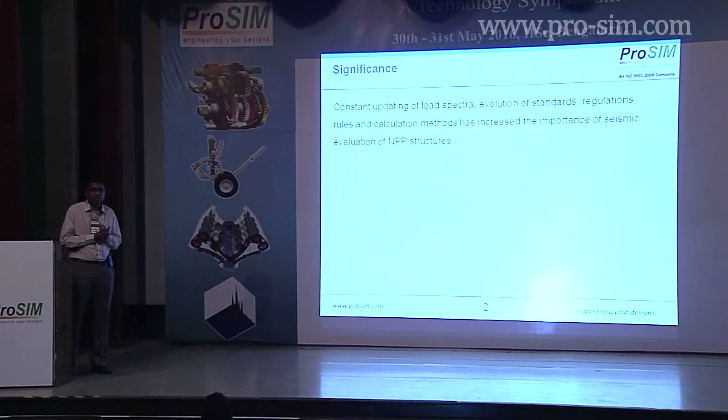We'll be talking about the significance of seismic evaluation for nuclear power plants.

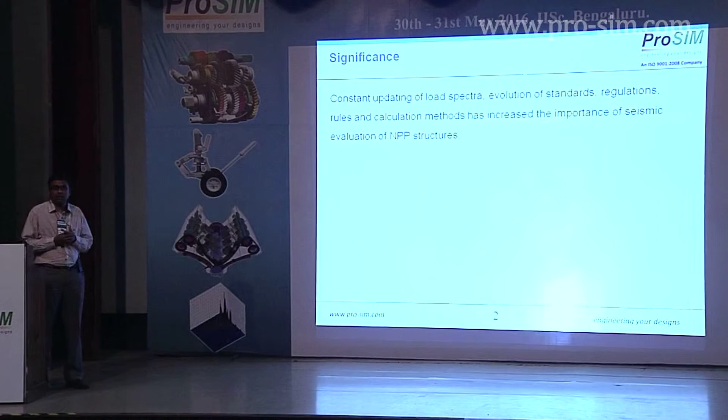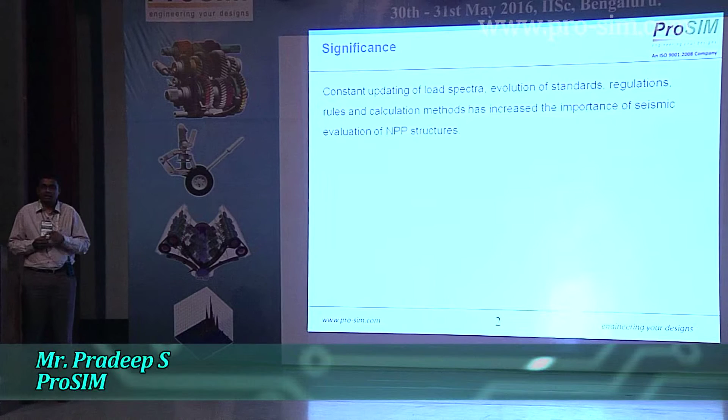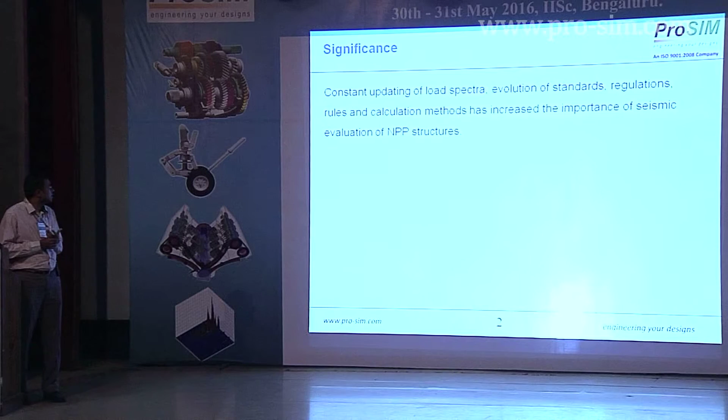First, there's been a constant updating of the loading spectra. Whenever we have a major earthquake, the authorities have a rule that the seismic map of the country has to be redone. Based on that, we've had updating of the loading spectra. Over time, we have had evolution of the standards, regulations, rules, and calculation methods. All of these have put the importance of seismic evaluation to a different level.

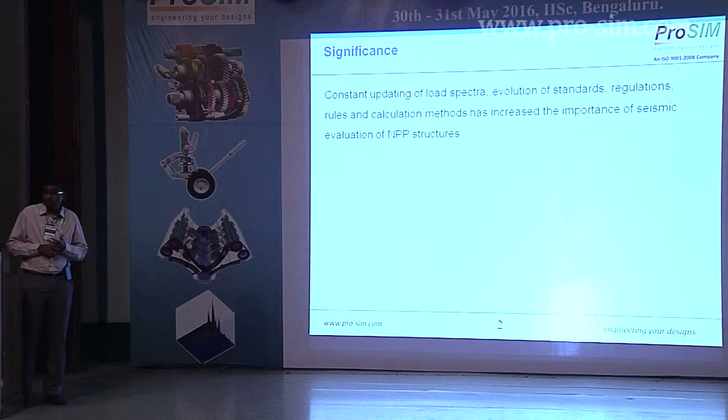Until March 2011, when the Fukushima incident took place in Japan, many of us were not really aware of what could happen in the event of a nuclear meltdown. All of this has now emphasized the requirement of seismic evaluation of NPPs.

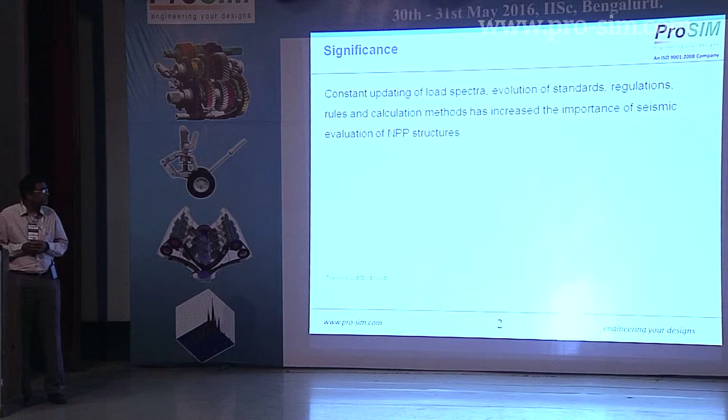Next, please. To come to the type of seismic vibrations: first category is events which take place in nature. Whenever we have a tectonic variation under the earth, we have earthquakes, and whenever we have magma flowing under the earth, we'll have volcano eruptions.

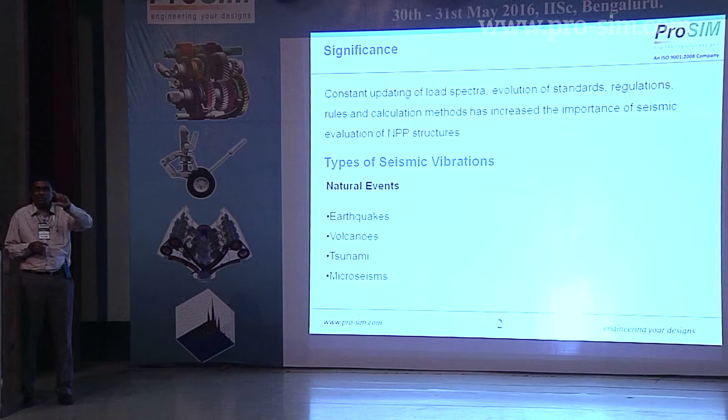And as I mentioned, the word tsunami - the sad irony is that this is a Japanese word. Until 2011, nobody was aware of it, but nowadays even the auto drivers and taxi drivers are familiar with this word. They put this behind their vehicles: do not follow me, I am tsunami. That's the kind of impact that's been made on the public.

Microseisms are mild murmurs, as they say, which take place under the earth at a very deep level.

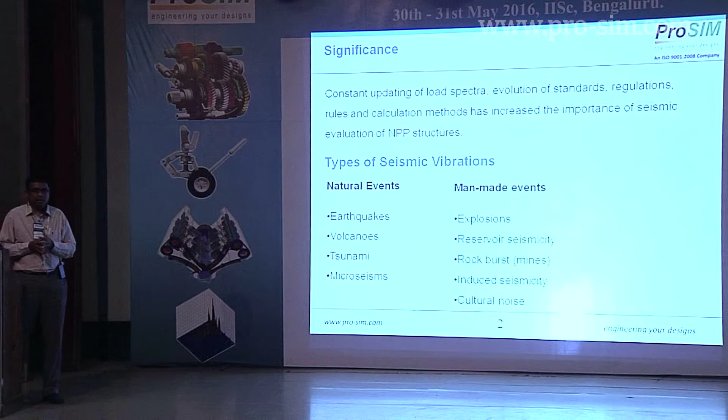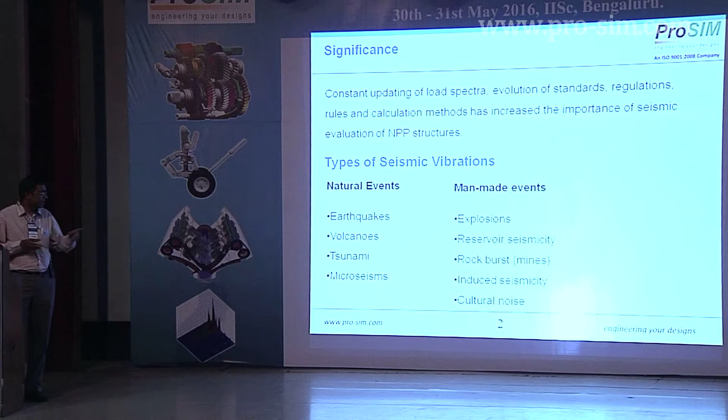Then we have man-made events: explosions, which could be nuclear or chemical. Whenever we have huge dams and lakes, we have reservoir seismicity. Many times we've read in the news that mines collapse, resulting in bursting within the mines, which gives rise to rock bursts and seismic vibrations. Induced seismicity is when we have huge drill rigs, especially in the oil and gas sector. And then we have cultural noise, which is going up day by day - vehicular traffic and so forth.

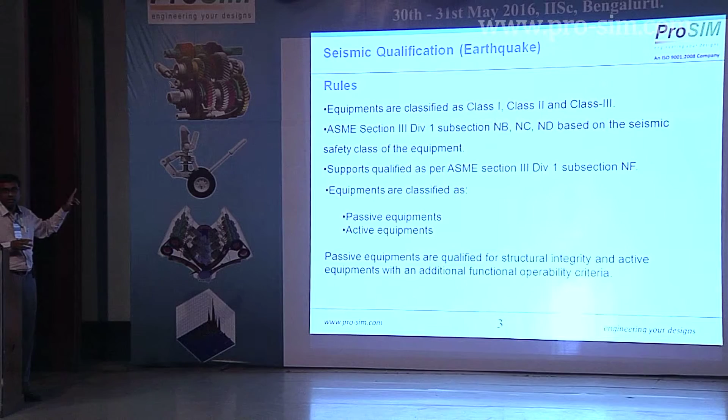Before we start the seismic qualification, I would like to mention that this presentation covers only the natural phenomenon, that is earthquake. There are certain rules before we take up the qualification.

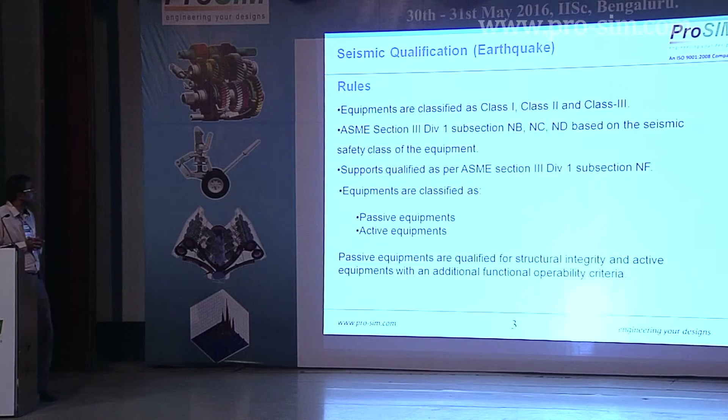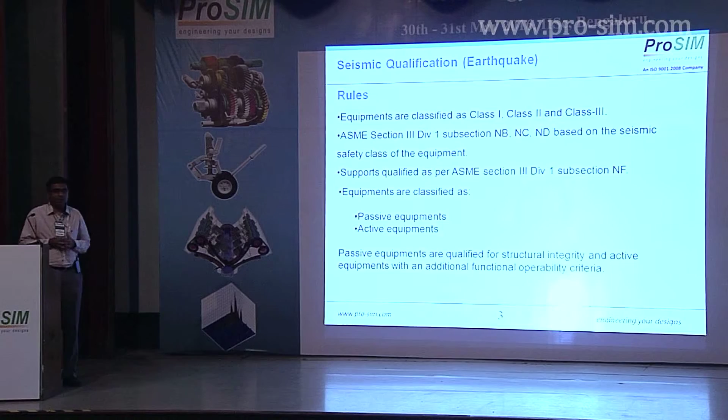All equipment in a nuclear power plant is classified into class 1, 2, and 3 based on their severity. A class 1 equipment is that equipment whose performance, or the lack of it, will directly impact the safety of the reactor and its auxiliary equipment.

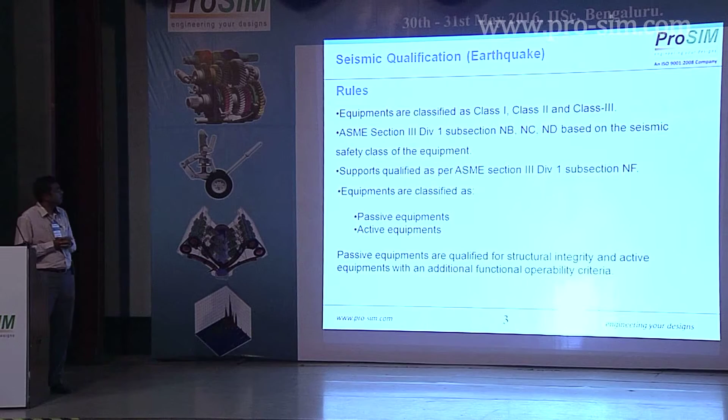The ASME Section 3 is the one which addresses the nuclear parts. The subsection NB is used for qualifying class 1 equipment, NC for class 2, and ND for class 3. The supports are to be qualified as per a different code, again Section 3 NF.

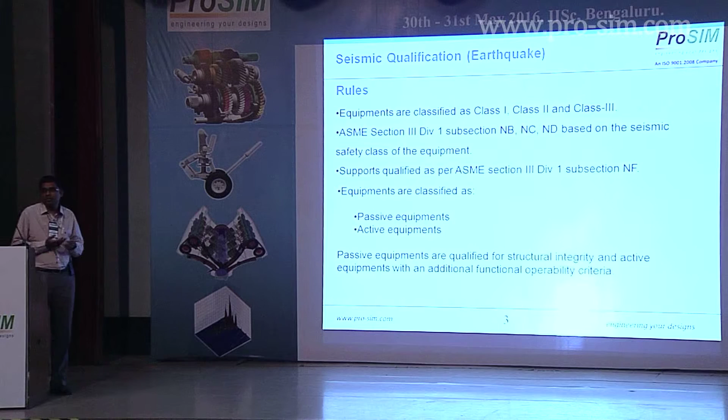But before that, all equipment is also classified as passive and active equipment. Passive equipment are those which do not have any relative motion within themselves - for example, a pressure vessel or piping can be classified as passive equipment. An active equipment is one wherein parts are moving relative to each other - for example, a valve, a pump, a compressor, or a motor.

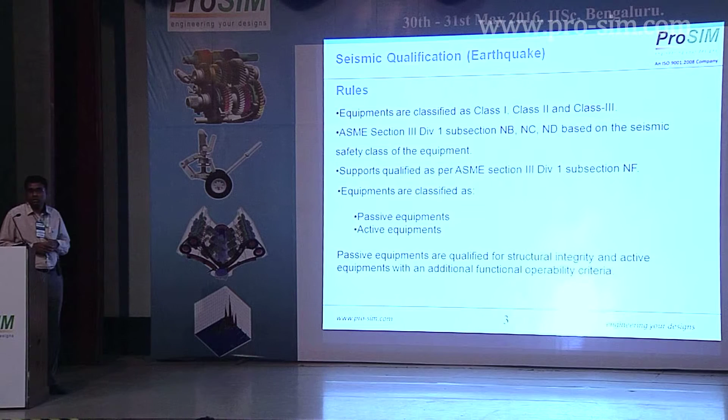So the difference between them is that passive equipment is to be qualified only for structural integrity, whereas active equipment has to be qualified both for structural integrity and functional operability. The functional operability criteria will decide how the particular equipment will behave during the event of an earthquake.

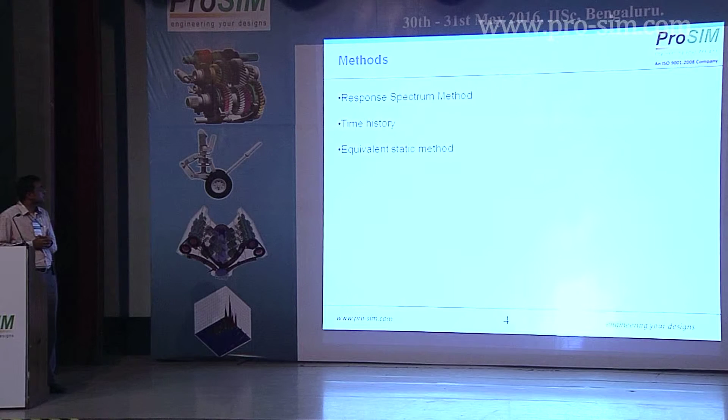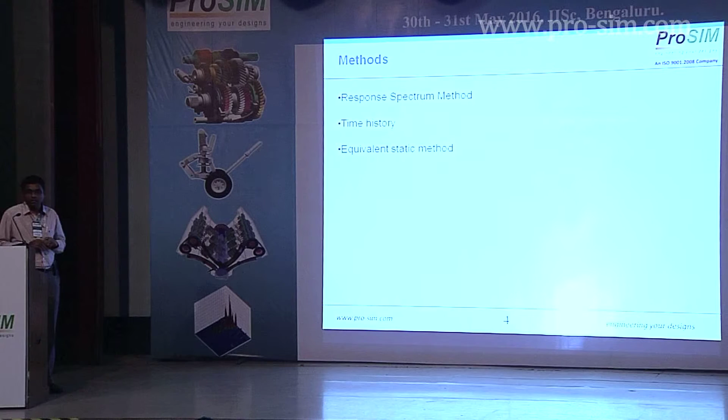There are different methods in which structures can be qualified. The first is the response spectrum method, which I'll be talking about today. Then there's the time history method, where you have direct acceleration versus time. And then we have the equivalent static method, where you just take 1.5 times the acceleration value and apply it as a static load, but that is applicable only when you have a natural frequency above the cutoff frequency.

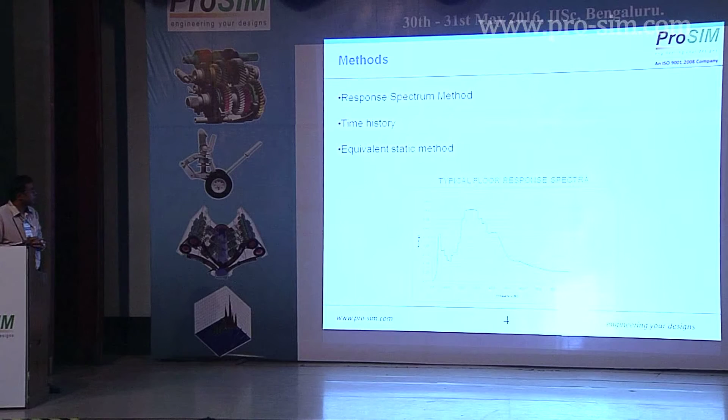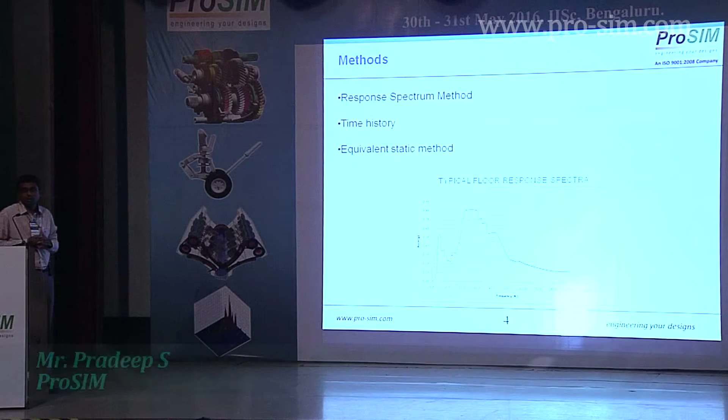So this is a typical floor response spectra. This particular spectra is available at all different elevations of a plant. So the floor response spectra corresponding to the elevation where the equipment is mounted has to be used for qualification. This spectra will be different for the three directions. For example, if x is horizontal and we do not have the vertical direction, we can take 2/3 of the horizontal for the excitation.

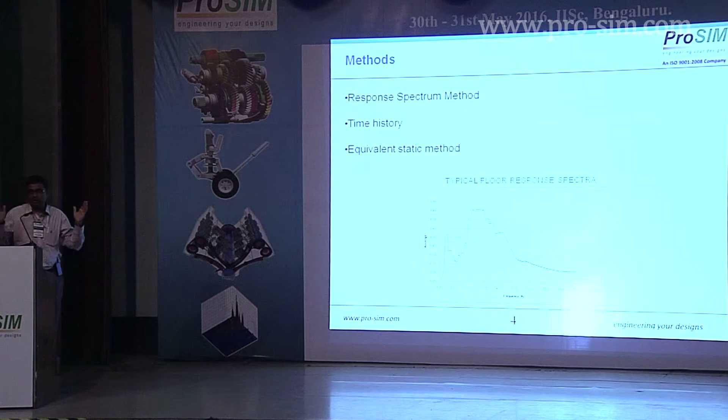So the way this works is that we do a natural frequency analysis of the particular structure, and based on that we run the response spectrum analysis. Those frequencies corresponding to the accelerations are multiplied, and all results within the frequency of the spectrum—in this case 100 Hertz—are combined using the CQC or the SRSS method, based on the spacing of the natural frequencies, how closely or far apart they are.

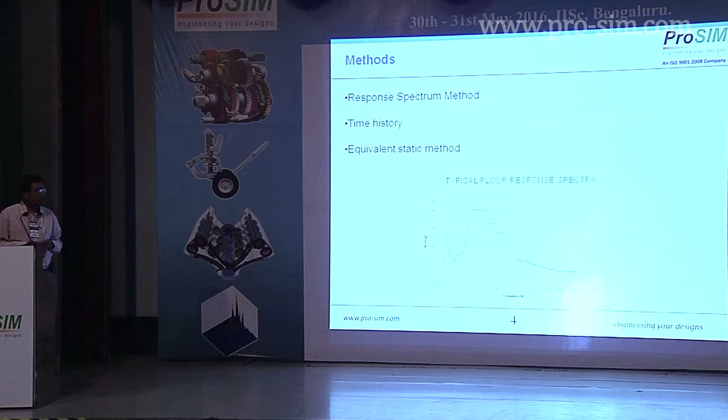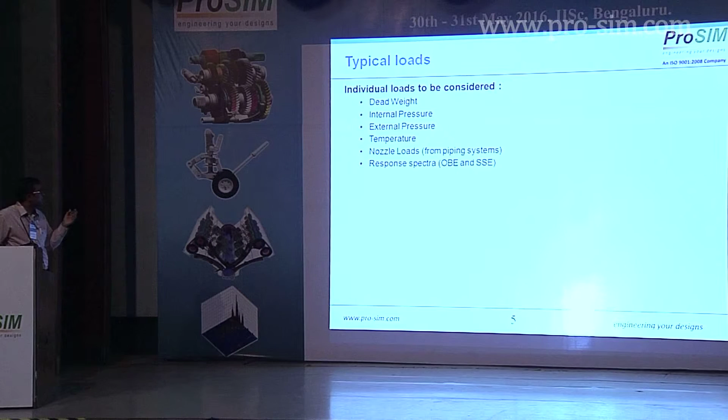So these are some of the individual loads that the equipment is typically subjected to: weight due to gravity, internal pressure, external pressure, and temperature. These are static loads, and then we come to the dynamic load cases, that is the OBE and the SSE.

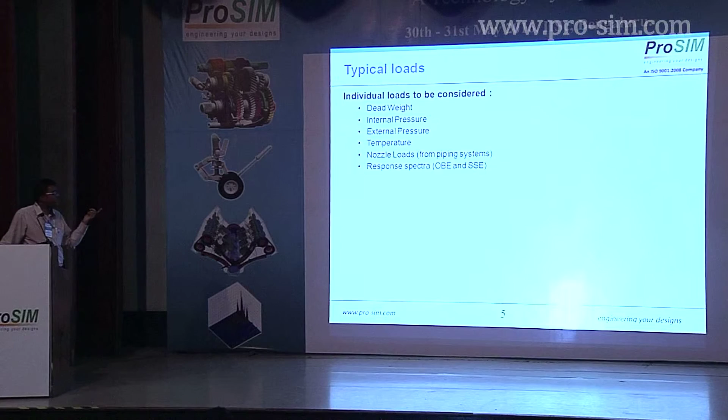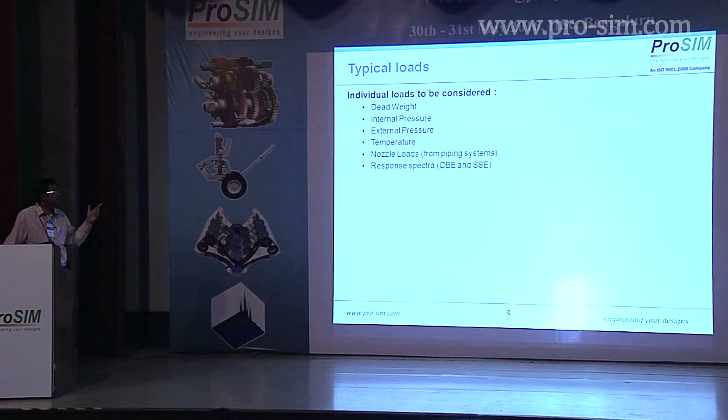OBE stands for Operating Basis Earthquake—the magnitude of earthquake wherein the plant has to keep running despite this earthquake hitting the facility. The SSE stands for Safe Shutdown Earthquake. Even if an earthquake of that magnitude hits the facility, it should be able to be safely brought to a shutdown situation.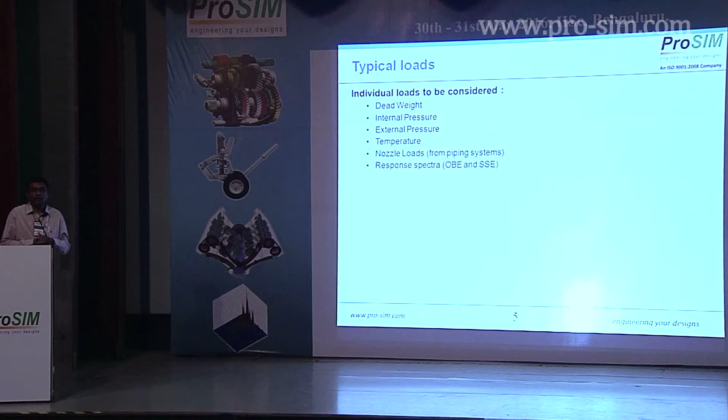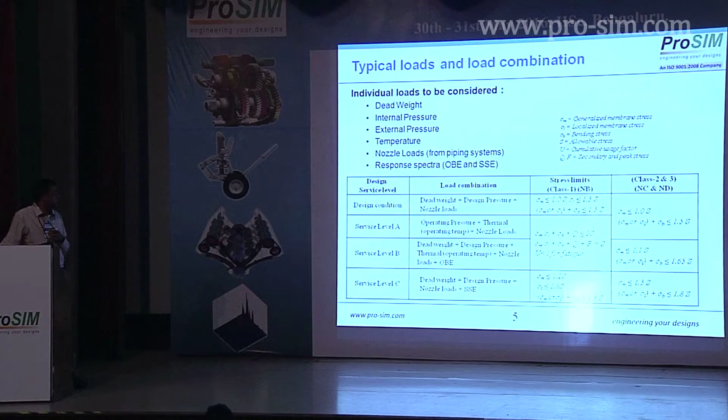So these are the different load combinations for which equipment has to be qualified. The design condition is when the plant is not working, and service level A is normal operation of the plant. Service level B is when we have an earthquake of the magnitude of OBE but still have to keep the plant running. Service level C is when there's a situation where we have to shut down the plant. These load combinations are arrived at from the plant operating guidelines.

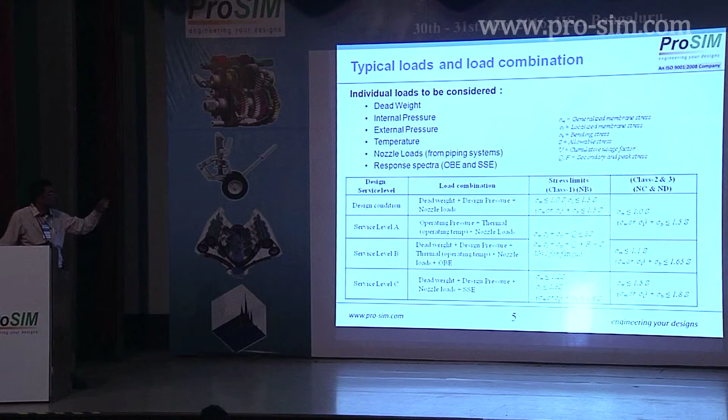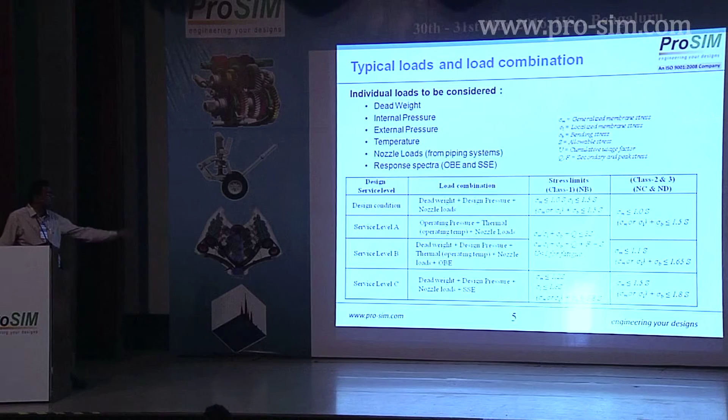So in the third and fourth columns, we see the allowable limits for the different classes of equipment. Here, NC and ND—class 2 and 3—are the same because we also have one more level, level D. But in the case where the SSE load can be taken in load C, load D can be omitted. That's the reason why class 2 and class 3 have the same qualifying criteria.

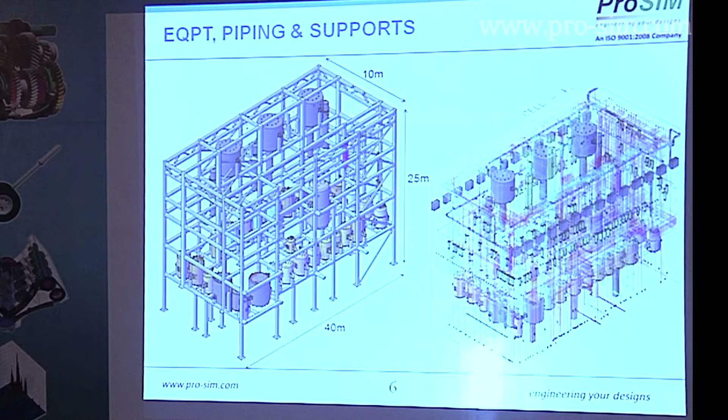This picture gives a fair idea of how complicated a plant can be. This is a nuclear fuel reprocessing plant with about 2,200 pipelines, about 45 to 50 vessels, and lots of nozzles, intersections, and T-joints. This equipment structure will have hundreds of welds which are to be qualified, again hundreds of bolts of different sizes.

So we devised a mechanism in which the pipes can be separated into bundles—classified into different parameters based on our studies. We have our own macros in which we can run the static loads and the dynamic loads and combine them. We have an automated system for that, and also an automated system for qualifying this equipment for different service levels.

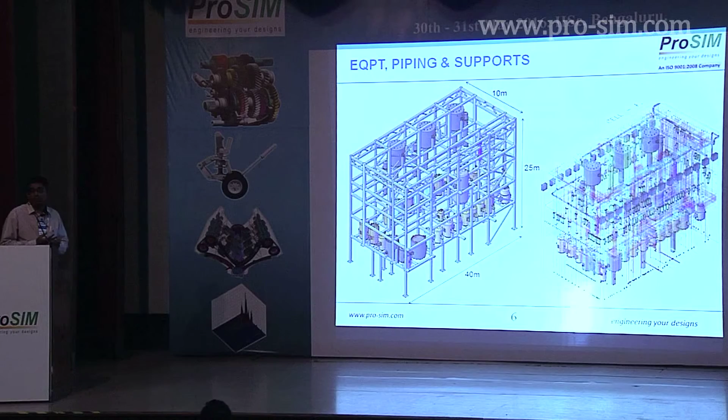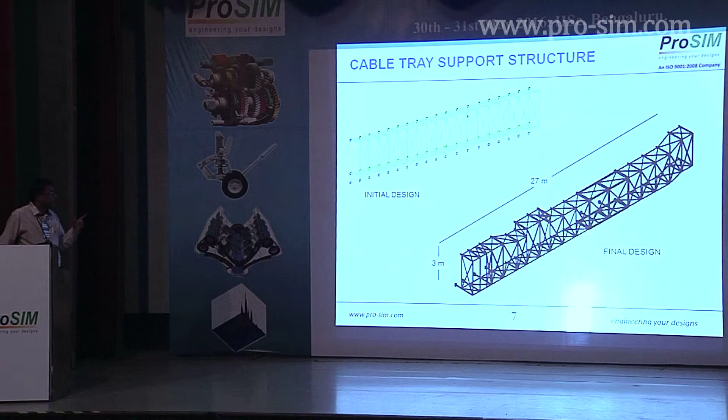So this is as per the site requirements. This is heavily optimized—you can see we have gotten rid of all the props that were there in the initial design. I don't think this would have been possible through analytical design alone, and also because of the size factor, I don't think you could even have this on a shake table or anything like that.

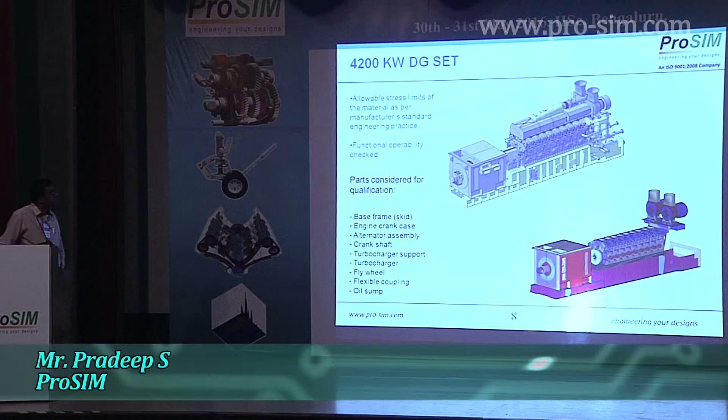This is a 4200 kilowatt DG set weighing about 90 tons. The engine was shipped from Germany, the alternator was from France, and the base frame was made in India. So we had to put all of them together, and somebody has to qualify it before it can be put into a nuclear power plant—that's when we came into the picture.

But because this is equipment not classified in any of the ASME codes, it has to be qualified as per manufacturer standards, and the ASME codes of qualification did not hold good in this particular case because the load combinations were not as per the standards.

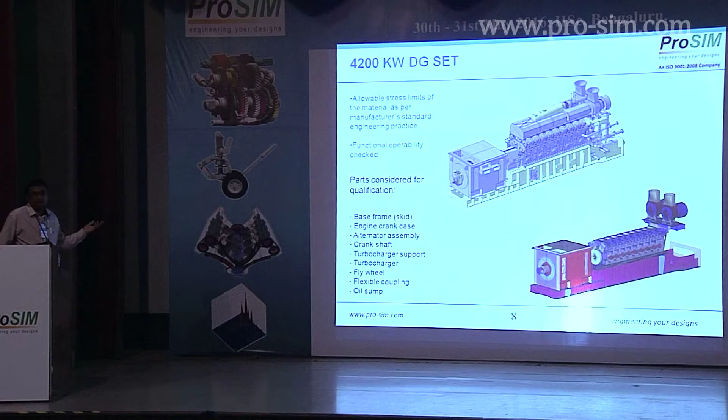So this was one of the load cases for the DG set, where we had this load curve for 2 rotations, 720 degrees. We had to analyze every 15-degree rotation of the crank, that is, 48 load cases, and we had to pick the worst case scenario in order to qualify this particular DG set.

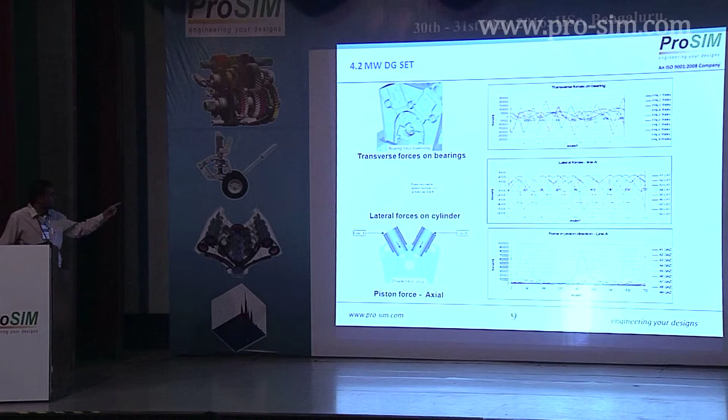As I said before, the load combination for this particular equipment was not as per the standards. We also qualified the alternator for abnormal running condition, that is load case 4, where we have this immense load, a reverse torque due to the short circuit load.

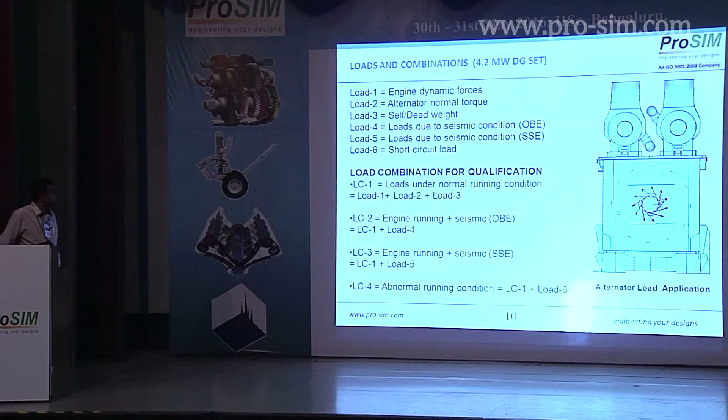This picture talks about the sloshing that is being captured inside a tank. During a seismic event, especially vertical tanks which are filled with fluids, they undergo sloshing, which could be even more detrimental than the earthquake itself.

So we have arrived at this. We follow this particular method for evaluating the sloshing inside a tank. This is called the Housner model, wherein the pink springs represent the sloshing mass, that is the convective mass, which is the mass of the water that will be sloshing around, connected by springs to the inner surface of the tank. The yellow one represents the rigid links, wherein the non-sloshing mass will be connected.

More about this particular concept can be had online, which is available freely. It's a paper jointly produced by one of the IITs in association with Gujarat State Disaster Management. You can download that particular file, and you can get to see the equations by which all these are arrived at.

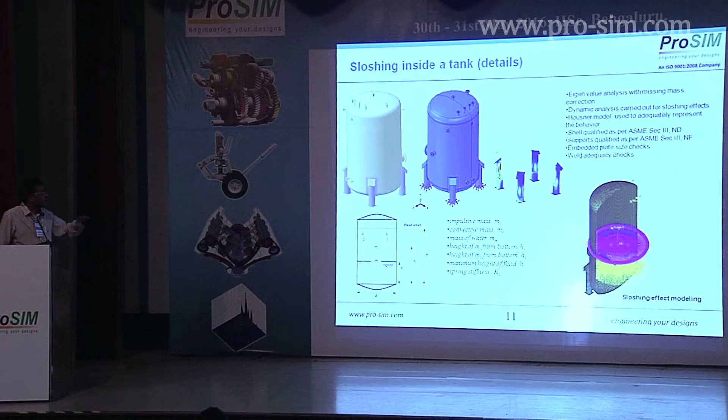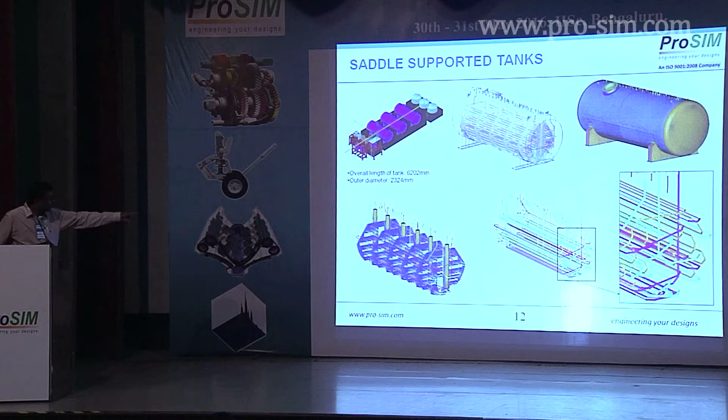This is a nuclear waste handling tank, which is about 30 meters under the ground. The main reason for putting this slide is to show the complicated nature of the baffles and the intricate arrangement of the tubes, which are at high temperatures inside the baffle. Again, for this particular tank, we had to do the nozzle, the sloshing, and the various nozzle loads which were coming on top of the tank.

This is a lattice tower-supported chimney which we did for our plant in Rawatbhata in Rajasthan. The end user had received a notice from the Environmental Pollution Board that some of their DG set silencers were not above the prescribed minimum height of 30 meters. So we went to the site.

Because this was a new design, we had to see the availability of the plates which we could make use of to design this particular structure. Again, a part of the structure was within the building itself, and another part was coming from the ground next to it. So we had to decouple the entire arrangement using the decoupling criteria, and eventually we did manage to design this particular structure. It was finally erected, our end user was allowed to run the plant, and the pollution control people were pretty happy with this one.

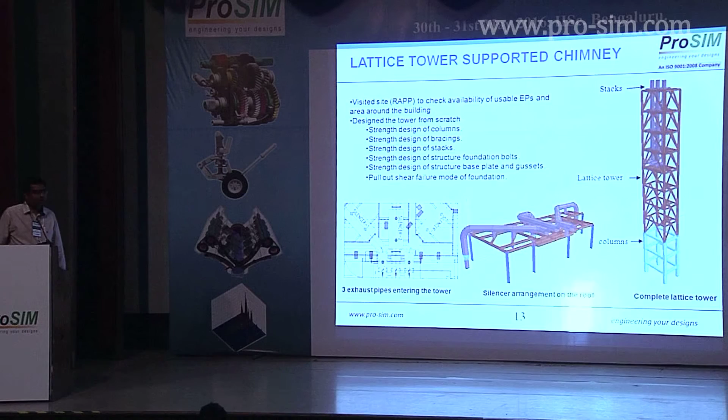So in order to conclude my short presentation, I would say that seismic qualification is mandatory for all equipment before they are installed in a nuclear facility. Unless it's done, you cannot have your equipment inside. ASME Section 3 is applicable for the qualification of these equipments. This is decided mainly on the safety class, that is the seismic class 1 or 2 of the equipment.

As I said, FE software provides a comprehensive assessment for qualification, because you can't really put every equipment on the shake table. Even if you put it on a shake table, it will only say whether it's passing or not passing. But if you want to know the margin, how close it can go to the allowable limit, and see the details of stresses or deformation in each and every part, you have to go with FE software.

So the last 4 bullet points are our capabilities, where we have developed our own macros and scripts for load combination and qualification. In fact, we are also now working on ways to automate the report preparation, so that we can minimize human intervention, error, and also expedite the qualification process.

So far, in the last 5 years, we have successfully completed more than 45 projects on seismic qualification. These include hundreds of tanks, vessels, and compressors, and many such equipment. Practically, we have qualified every electrical and mechanical equipment.

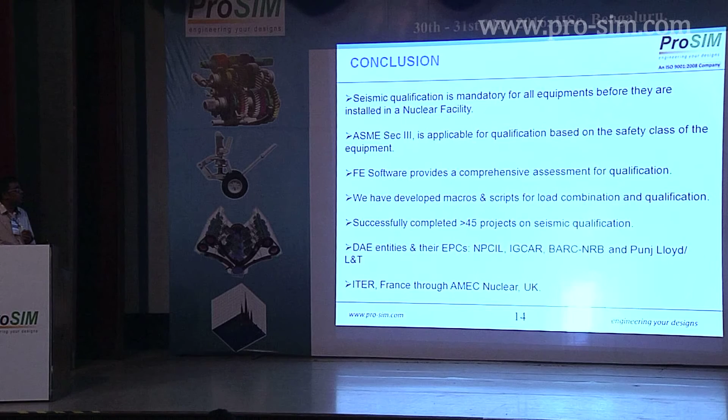In India, we are working with all DAE entities and their EPCs, namely NPCIL, IGCAR, BARC, and with leading EPCs like Punj Lloyd, L&T, and many of their subcontractors. We also did one overseas project for ITER France through AMEC Nuclear, where we qualified a section of the tokamak reactor which is coming up in France, at Cadarache.

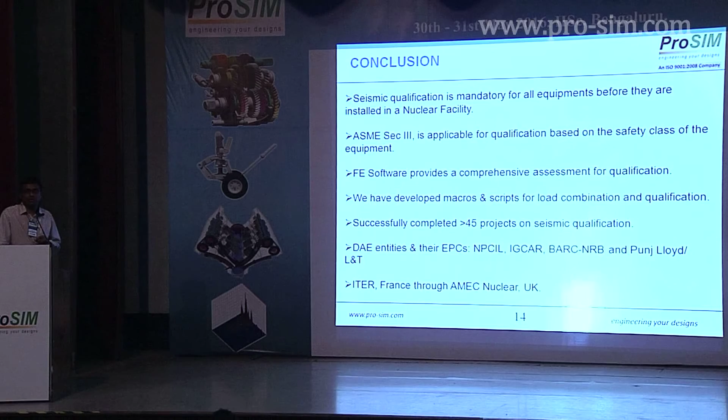So with this, I would conclude my very short and quick presentation. Thank you.